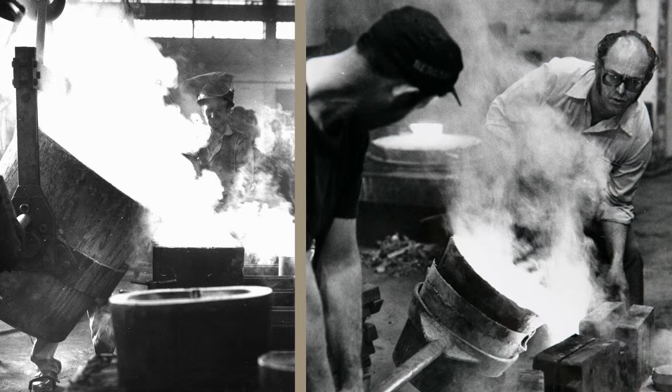At the start of the decade, Frese was a small local company that made pots and pans. During the 50s, the production gradually changed, leading to the development and manufacture of taps and valves.

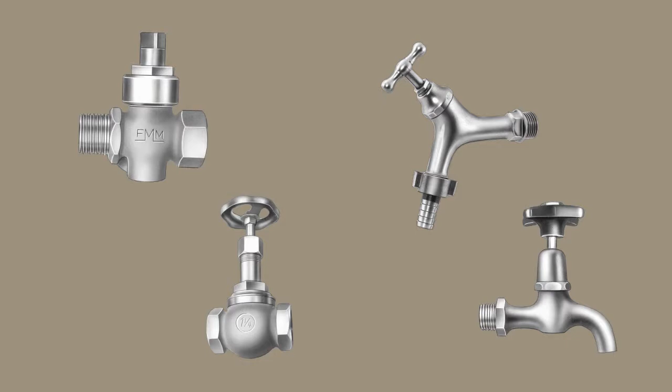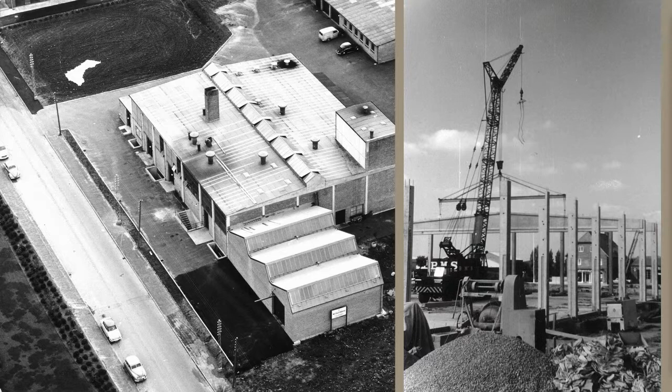Bo Frese purchases an industrial site from the local municipality in 1960. The site is outside town, and Bo builds a factory there, where it still stands today. The site has been developed several times and new buildings added. The total production area is now more than 15,000 square meters.

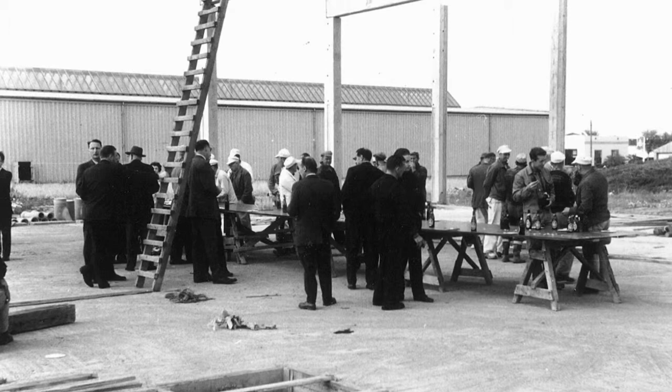Production steadily increased during the 60s. The many Danish shipyards, building ferries and merchant ships, all require pumps and equipment made of bronze.

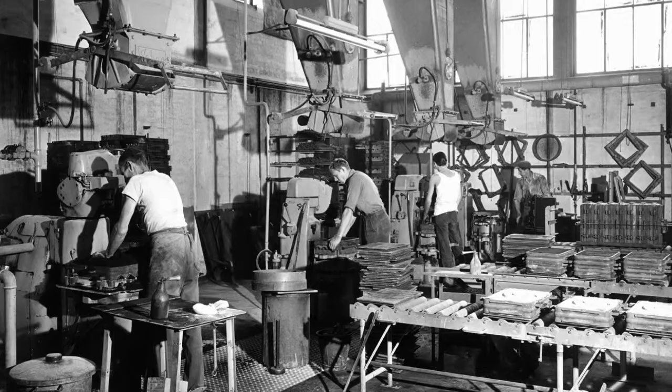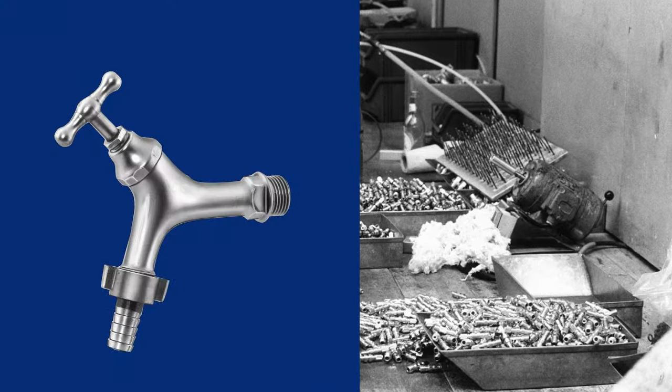The detached housing boom of the 70s fuels an increased demand for plumbing products, including taps, creating new market opportunities for Frese to exploit. In the middle of the 70s, the first hot stamping was installed in the factory, making production more automatic and industrialized whilst increasing efficiency.

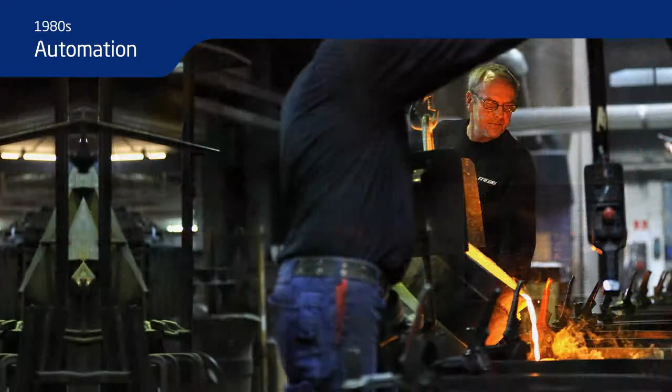The factory expands yet again. The first CNC machine marks the start of the automation process, increasing productivity and improving product quality. The installation of induction melting in the foundry leads to large energy savings and improves the general working environment.

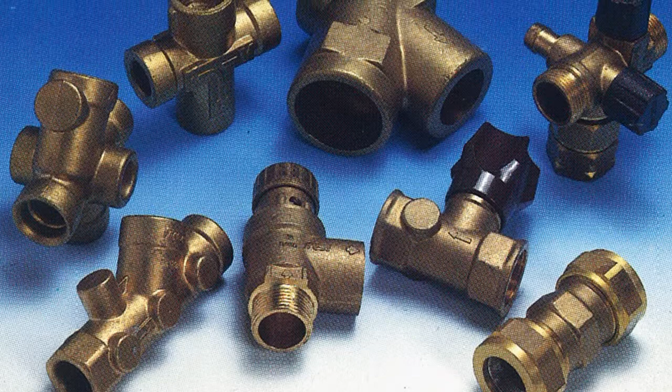Frese becomes the leading Scandinavian manufacturer and supplier of plumbing products. Frese introduces automatic balancing valves for the heating, cooling and ventilation markets.

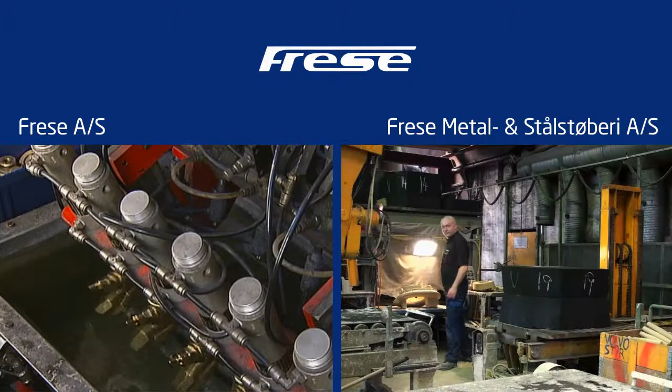Frese divides into two independent production entities. One develops and manufactures valves based on their own patents and sells to markets around the world. The other, the foundry, becomes certified by Det Norske Veritas, DNV, and focuses on the maritime industry in Northern Europe. The combination of these two individual business areas puts the company on a sure footing.

Frese now has all of the skills required to develop the best solutions and increase customer support, on land and at sea, across the world.

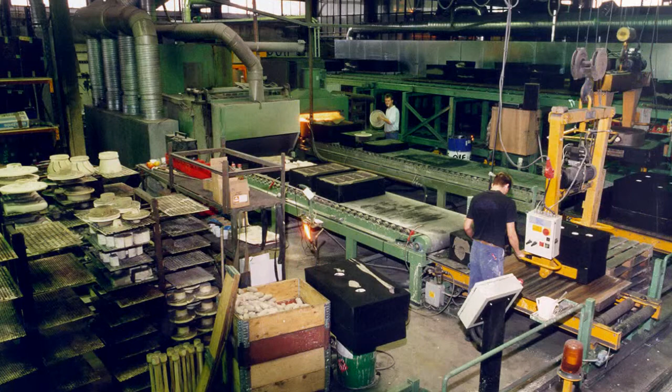Frese installs the largest automatic molding line in a European metal foundry. The production area once again is increased.

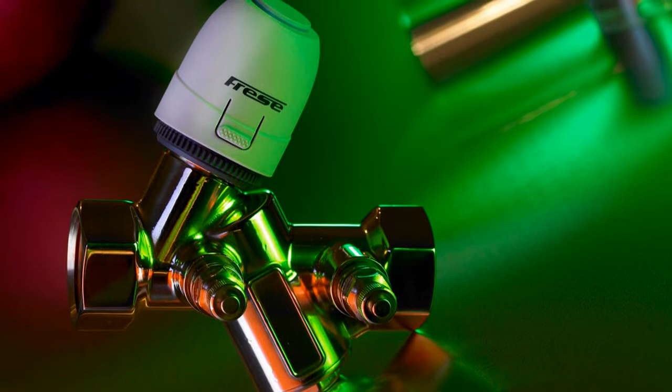Frese strengthens its market position further with a broad range of automatic balancing valves, including an extended range of control valves. Frese issues patents on more innovative technology for the automatic balancing of heating and cooling systems.

Frese balancing valves are widely used in hotels and other large buildings around the world. The valves provide users with substantial energy savings due to their excellent balancing options and design.

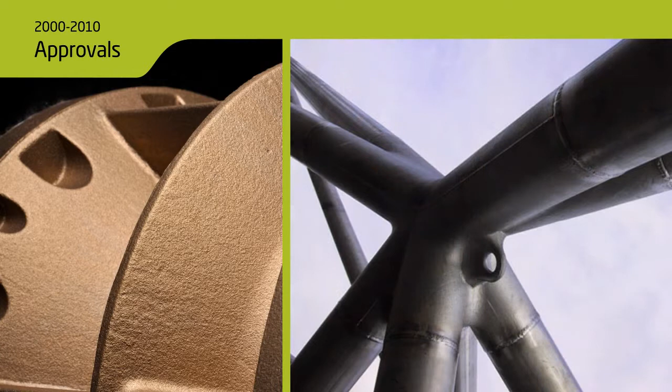Frese's seawater-resistant foundry technology for materials such as bronze and stainless steel leads to more efficient pump systems for ships and the maritime industry, and is now certified by Lloyds and Bureau Veritas.

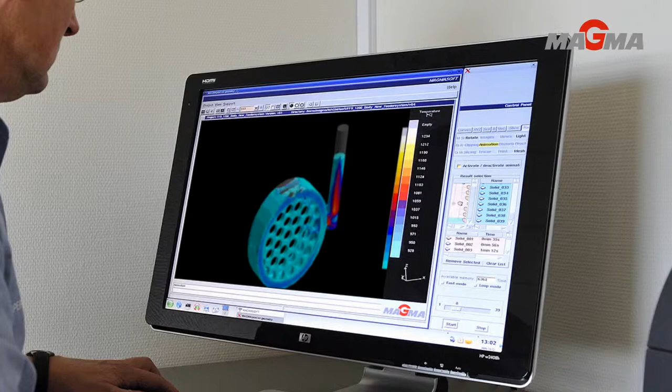MagmaSoft, the comprehensive casting simulation tool, is installed at Frese and increases quality by identifying problems and potential production faults before production begins. Frese is now an international company with subsidiaries in Denmark, the UK, Germany, Turkey, the Middle East, China and Australia. Frese also has many distributors all over the world.

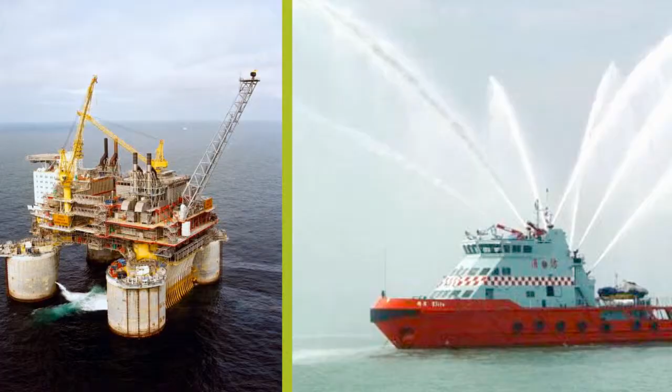Frese continues to produce and deliver quality, engineered solutions for many international construction projects, cruise liners and container ships, power and heating plants, offshore installations and firefighting equipment using seawater.

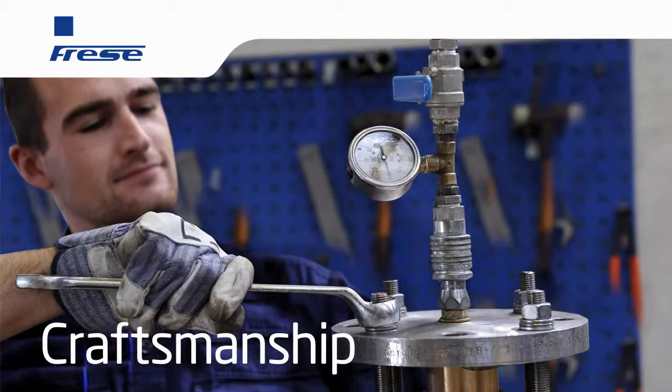Today and for the future, the Frese Group consists of innovative specialists finding new solutions based on excellent craftsmanship, industry experience and expertise, and technological insight.

Frese products and services will continue to be part of a global solution in the future.